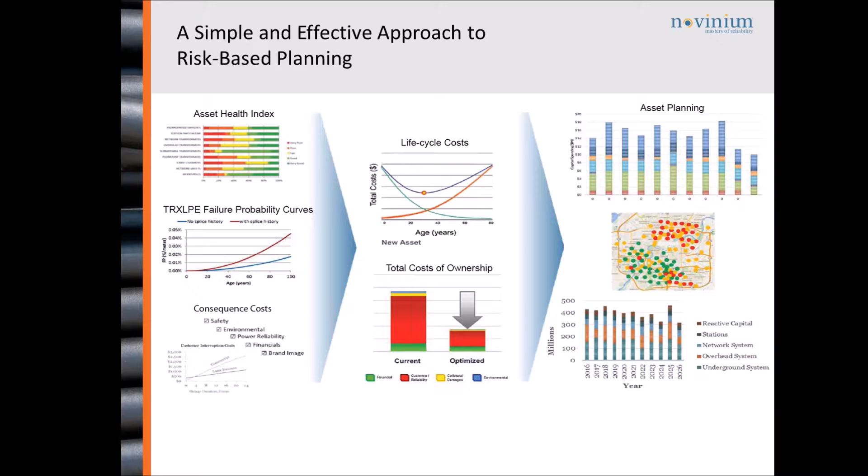In terms of the cable planning approach, this really begins by looking at the utility's data relating to cables. That includes condition assessment information that can be used to determine the failure probability of the cable, and it also involves the quantification of the cable's impact if it fails. These two components can be used to measure the risk of cable failure, which can ultimately be used as part of a life cycle costing and total cost of ownership analysis.

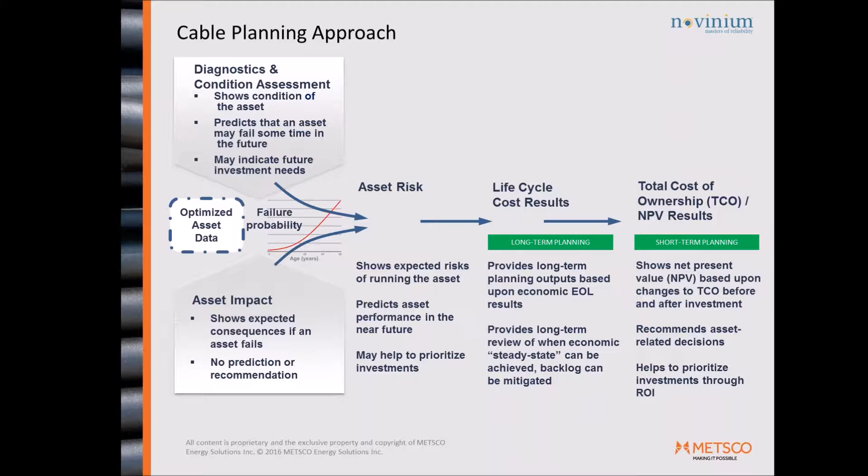I want to talk about the individual building blocks we're using as part of this risk-based assessment, beginning with the cable's condition assessment or health index. How do we develop a health index for cables? We start by building an architecture with the help of subject matter experts at a utility who have knowledge of the specific types of cables or subtypes of cables that are introducing problems within a given distribution or transmission system.

And then we'll also look at all of the different types of data that would be available on underground cables. We'll look at the testing information, maintenance and inspection information, and from all of this we're able to develop an architecture that can be used to quantify individual health index results for each cable segment. That will be done using the cable's asset age, inspection data, loading data, as well as degradation factors which are individually weighted as they relate to the overall probability of failure of the cable asset.

Some of the issues we've seen with polymeric cables, especially those installed between the 1970s and 80s, include water tree phenomena, imperfections with respect to the jacket and semicon, and this can lead to issues such as overheating, partial discharge, and leakage around the splice, joint, and terminations, tracking and erosion. With oil-filled cables, we also see dryness phenomena.

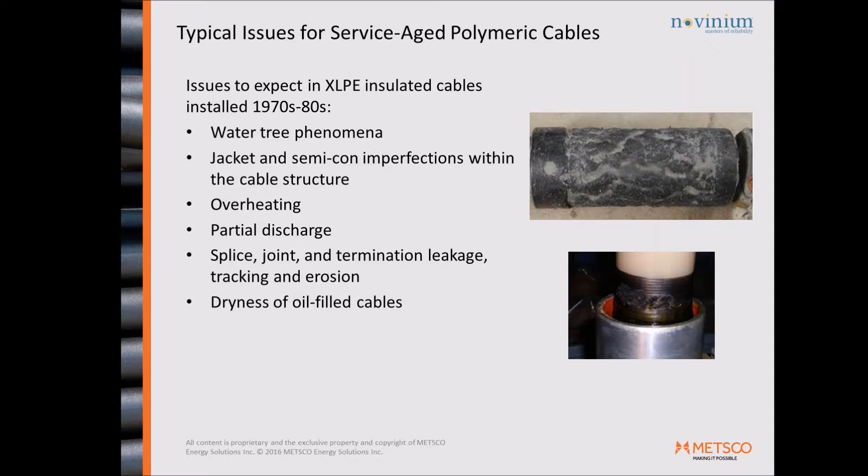So how do we combat all of this? We can develop a health index for cables, and this shows an example of how a health index can be implemented for polymeric XLPE cables.

Now, the health index is going to contain individual degradation factors. Degradation factors result in irreversible damage to the cables, resulting in the overall probability of failure of the cable asset. In this example, we have three degradation factors, including the service age, historical failures or cable failure analysis, and the cable's historical utilization or loading history. Each degradation factor is individually weighted as it relates to the probability of failure of the cable.

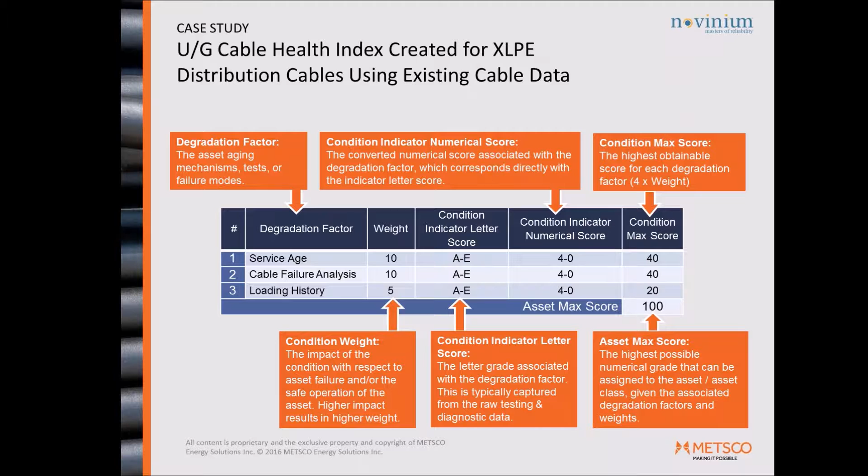Depending on the utility's processes, either a letter grade or a numerical score will be assigned to each degradation factor, and each degradation factor will carry a maximum score it can achieve. In this example, the highest score that could be assigned to this asset would be 100, meaning it would be in very good condition. The lowest score, which would be a 0, would mean that the asset is in very poor condition.

Now, each of these degradation factors will have individual grade levels, with definitions for each grade level. So in this example, based on the service age degradation factor, if we have a grade of A assigned to a given cable, it carries the youngest age — younger than 15 years. If we have a grade of E, it's going to be older than 45 years of age.

And we can translate those letter scores into numerical scores. So the grade of A, the highest, translates into a score of 4. The lowest, E, translates into a score of 0. And we see similar grades and definitions for the other remaining degradation factors for cable failure analysis and for loading history.

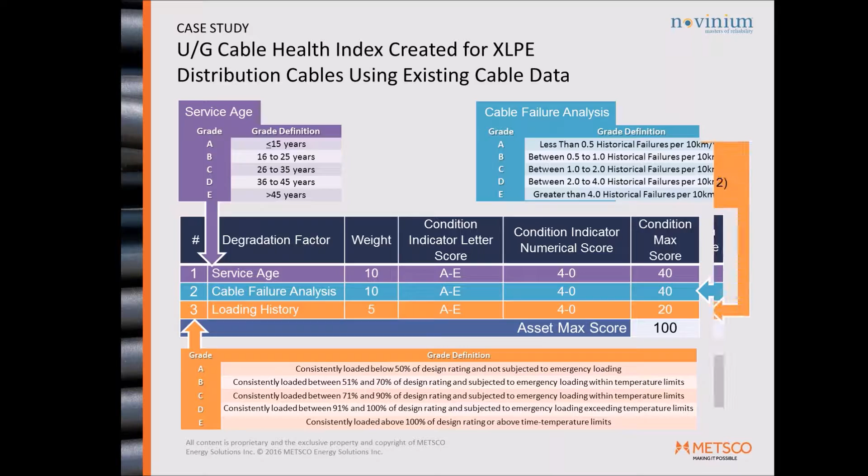So if I take you through an example: we could have a cable that has a score of 3 and a weight of 10 for service age, which would translate into a service age score of 30. In terms of failure analysis, maybe it has experienced a lot of failures, so it ends up with a score of E or 0, and failure analysis is given a weight of 10, so it would be assigned an overall score of 0.

And then the loading history — perhaps it's been assigned, based on its utilization, a score of C or 2, and loading history carries a weight of 10, so it gets an overall score of 20. Based on these individual scores — 0, 30, and 20 — we divide this by the maximum score that could be achieved for that cable segment and translate that into a percentage. In this example, we end up with an overall health index of 50%, or fair.

As I mentioned before, the health index numerically can vary from the best score of 100, which is very good, to fair, to poor, all the way down to very poor, and very poor would be anything between 0 to 30%.

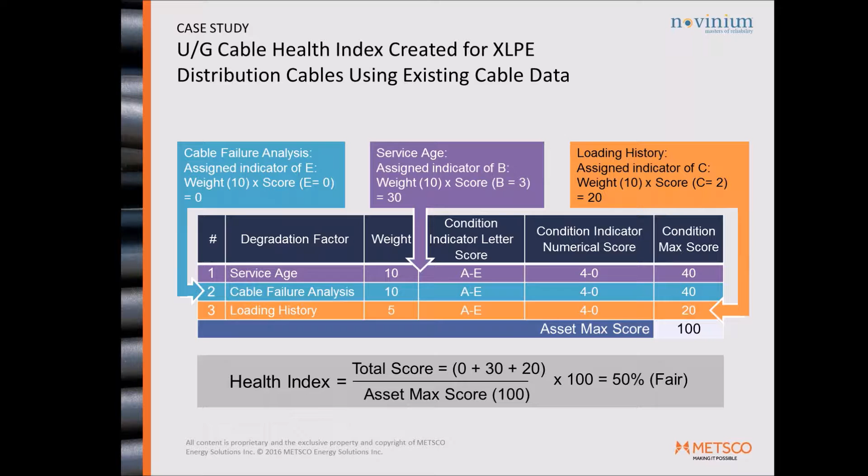Now, based upon these results, this can provide an immediate view to utilities on what assets they should replace and what backlogs they would face depending on the different health grades. So how many assets do utilities have that are, for instance, in very poor and poor condition, which would need to be managed in the near future?

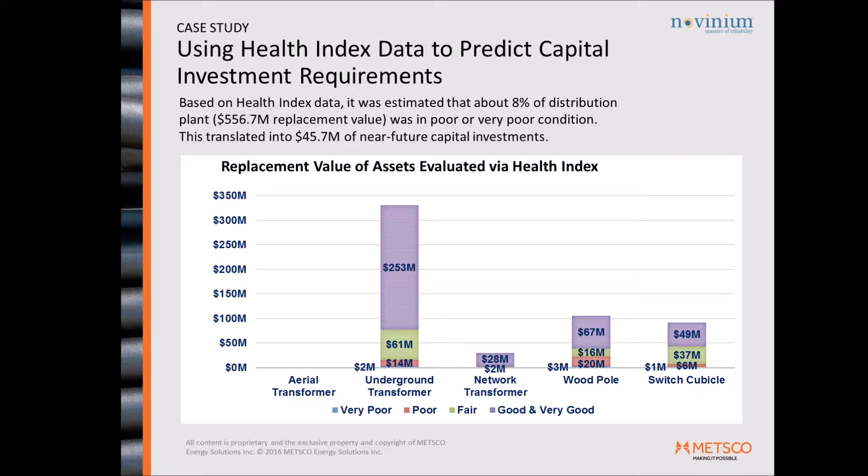In this example, we're looking at the replacement value of the assets as they're categorized by asset class and by the different health grade definitions. This gives an indication that 8% of their distribution plant or replacement value is in poor and very poor condition, which translates into about $45.7 million of near-term investments they're going to have to make. The replacement value is based on the total cost of replacing or rehabilitating that equipment based on material and labor cost.

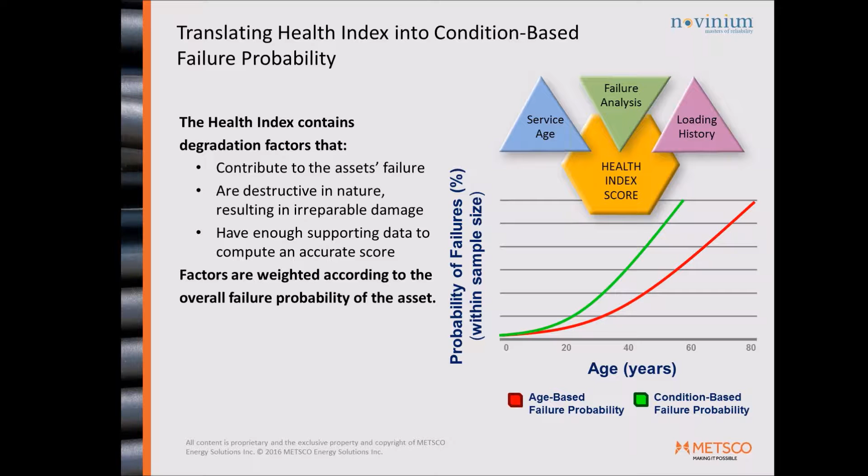So I want to talk a bit more about the failure curve calculation, how that allows us to predict the failure of the asset based upon either the age or the condition. How are these failure curves developed? It really starts by looking at the asset life data for each of the asset classes, including underground cables.

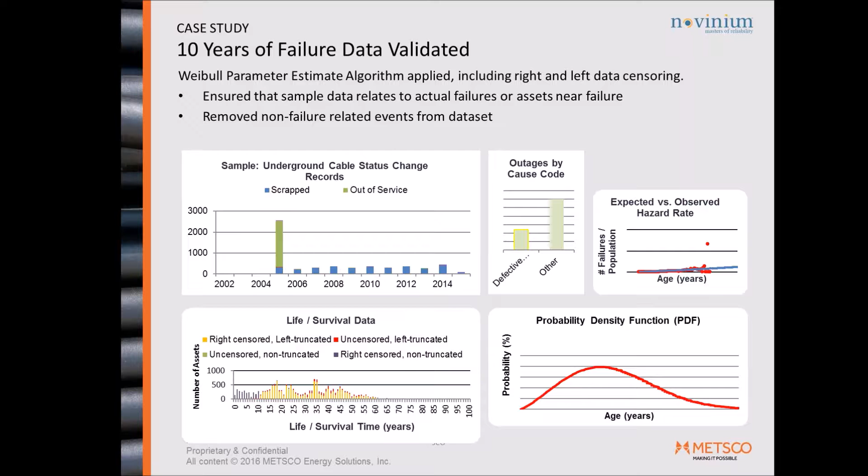We look at when the cables were first installed and when they were ultimately removed from service. We make sure that the data has been properly filtered so that we're only including those cables that actually failed or had been proactively replaced due to imminent failure. If that information is acceptable, we include all of that as part of what we call a probability density function, or PDF, which eventually gets translated into a hazard rate function, or HRF.

Here's an example of what that hazard rate function looks like. The hazard rate function is really the final failure probability curve that relates the asset's age to the failure probability. This is an example for cables. And in the case of cables, not only are we looking at the age, but we also look at the length, because the failure probability calculation is computed on a per meter basis.

In this particular example, we see that for XLPE cables, when the cables had historical events or splices, so splice history, we found that the cables were three times more likely to fail as opposed to cables that had no splices at all.

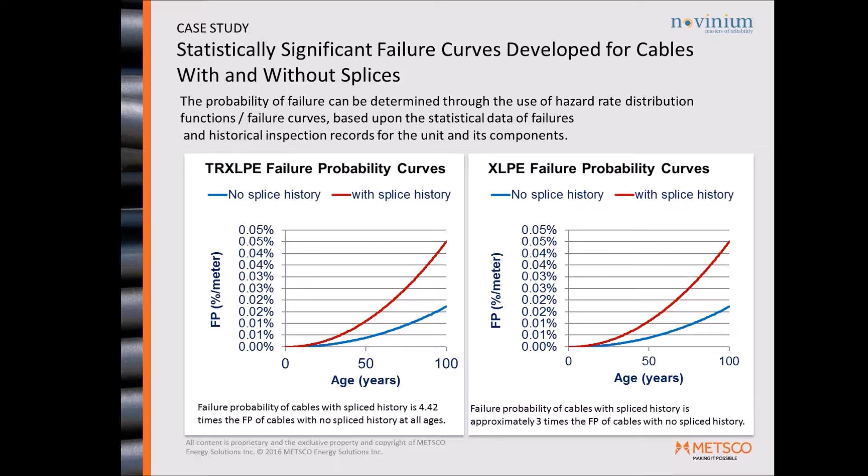So once we've determined the probability of failure, the next step is to figure out what happens when the failure occurs. What are the consequences or the impacts of failure?

As an example, if I look at this chart at the top here, I see a given asset. It has a failure probability of 5%. We can subdivide that 5% into different failure modes.

Here we see a specific failure mode table for cables. These are cables in cable chambers. We have XLPE and PILC cables in cable chambers, and each one has a specific failure mode assigned to it. We have relative probabilities for each one.

So we're saying that a cable, 95% out of that 5%, it could be just a normal failure, or 4.5% out of that 5%, it could be an instance where the duct has collapsed or there's no spare ducts available, or maybe 0.5% out of that 5%, it could go completely catastrophic.

For each one, we want to try to figure out what are the root causes that could result in those failure modes. We also want to figure out what were the outage durations, what was the impact to customers, and were there other impacts in terms of collateral damage. Were there environmental impacts? What is the overall scope of that outage? We want to consider all of those things when we are measuring the impact of failure.

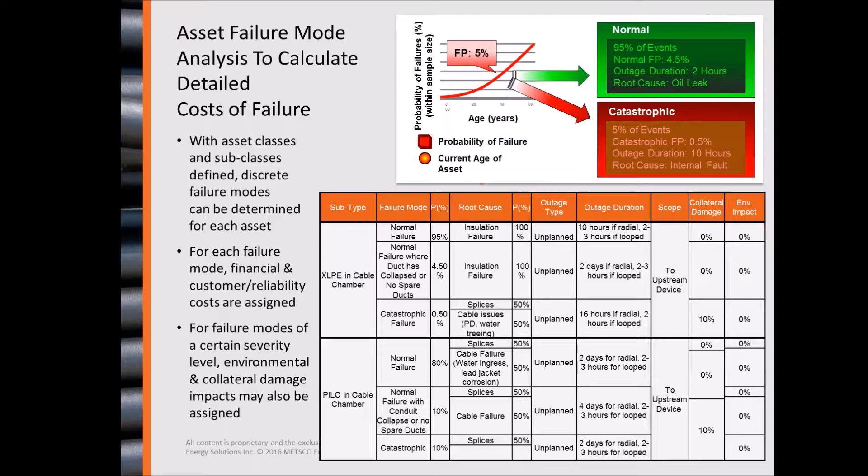In terms of some of the data we would use when trying to monetize the impact of failure, we want to take a look at outage information, historical injuries that have taken place, root cause analyses of damaged equipment, property damage, data on oil spills and leakage, cases of death, revenue loss, and claims that may have been filed against the utility. All of these can be used to establish different categories of consequence for a utility.

The most frequent categories we've seen used include financial, which are the direct costs of intervening on the asset, so either replacing or rejuvenating a cable, for instance. There's the customer impact, which is the reliability impact the customer sees when the outage occurs. There's environmental impacts, which could relate to oil leaks or PCB leaks, and collateral damage impacts, which relate to anything related to safety, injury, or damages to adjacent property when a catastrophic failure takes place.

Now, the customer impact is obviously one of the most critical elements. How do we come up with that customer impact? Well, we use customer interruption costs, and those are derived by really understanding what's happening when an outage takes place.

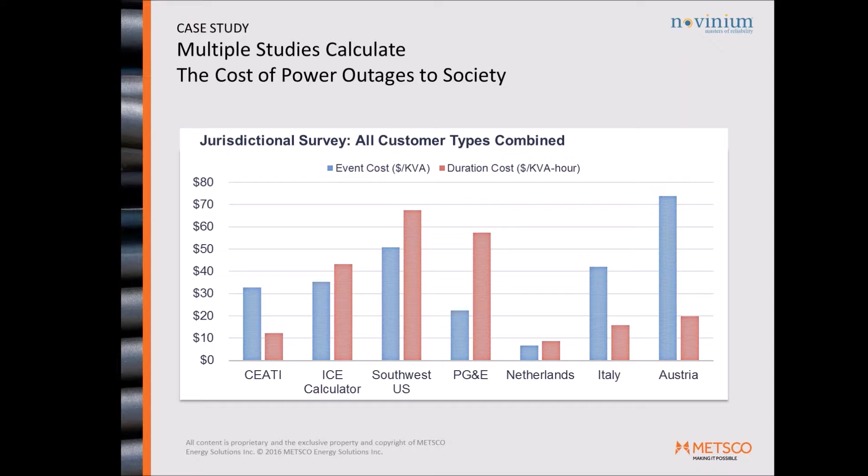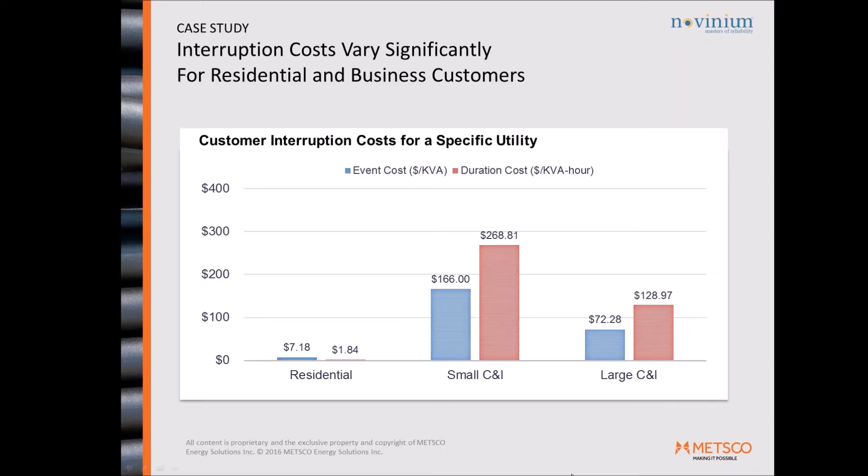Now, these numbers are typically generated by performing a series of surveys and advanced studies with customers in different regions across the world. We see some studies that have been done in North America and some studies performed internationally to arrive at different event and duration costs. And we also see that these costs can vary substantially depending on the class of customer, from residential to small commercial and industrial to large commercial and industrial. We can see some substantive differences in these event and duration cost parameters.

Now, it's important to note that residential customers, typically how their value of reliability is monetized is using a willingness to pay model, really asking customers how much would they be willing to pay to avoid an outage, compared to the data from small and large C&I customers, in which there will typically be direct revenue impacts and data available from those customer types, and that's really the direct tangible losses that those customers are experiencing.

I should say that for residential customers, we are seeing more of that data, direct tangible losses, coming into perspective for that customer class as well, as more customers begin to do more operating businesses from home or working from home. So there are more revenue impacts that are becoming more relevant.

But for now, if you just look at willingness to pay, what we see is that while we look at number of customers, yes, the willingness to pay compared to small and large C&I, it clearly dominates. But then in terms of how we convert all of that into a cost, recall that in our formulas we're using the consumption. And we see here that the consumption of residential customers typically has to be weighted against the consumption of large and small C&I.

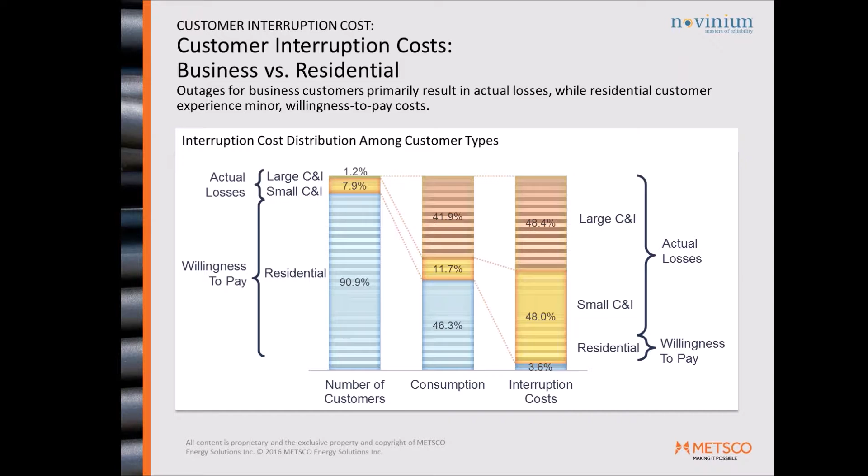And when we actually convert all of this into dollars, we see that the final willingness to pay value is actually a very small amount when measured across an entire utility system, when compared to the total net dollar amounts for small and large C&I, which represents, again, the actual losses that are being experienced. And so what this shows is that really when you're looking at customer interruption costs across an entire system, it's really the actual loss data that's dominating the equation compared to the minor willingness to pay costs.

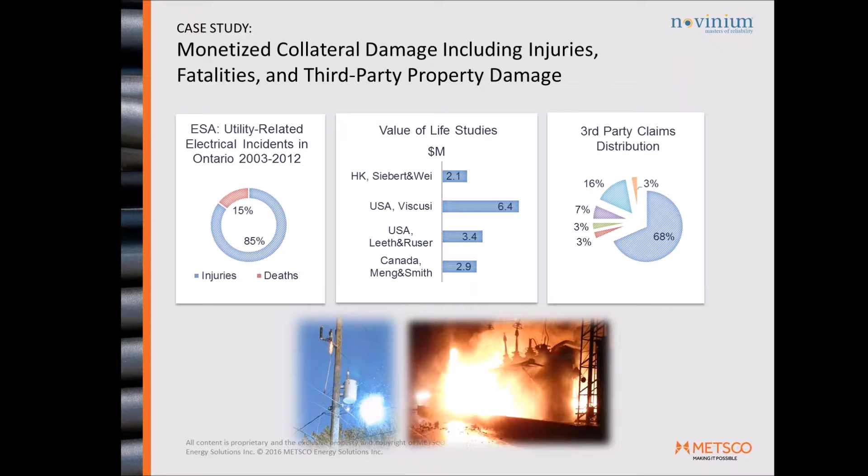Of course, we have to look at other impact categories, including collateral damages, which would be a combination of things like safety-related incidents, the value of a life, claims filed against the utility. These are just some examples that have been performed for utilities in Canada.

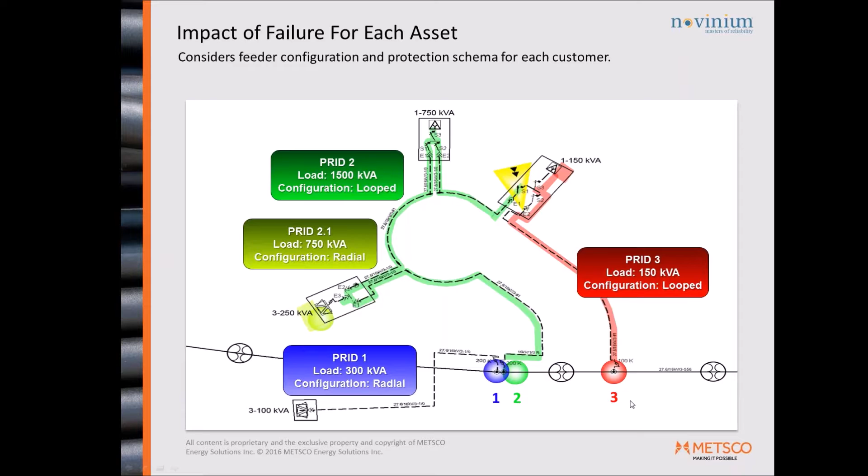Now, once we've established the probability and the impact of failure, now we can establish the risk, and then more critically, we can figure out, well, when do we want to intervene on the asset, and most importantly, what type of intervention do we need to apply?

Utilities are always facing essentially more and more challenges at a regulatory level. Regulators want to ensure that utilities have considered every possible intervention option. And for cables, most importantly, it's critical that both replacement and rejuvenation are considered as part of an analysis.

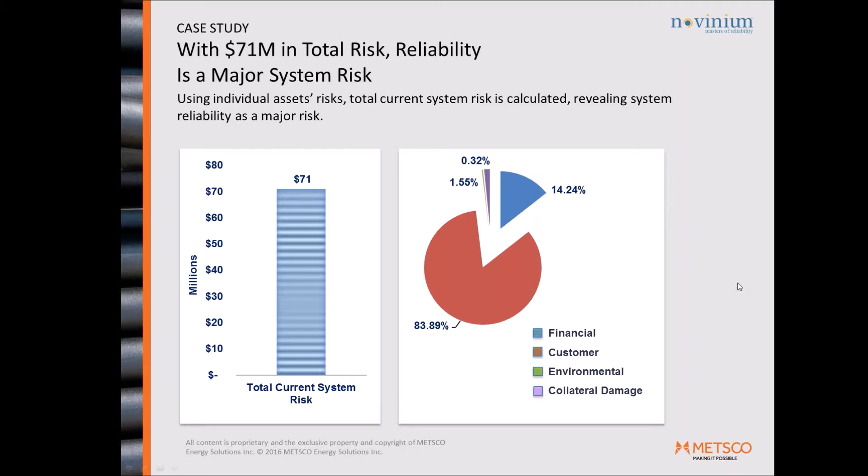So when looking at, for instance, the total risk that can be measured within the system, once we've figured out the probability and the impact, we can measure what's the total system risk. And in this example, we see just over 70 million in risk across an entire system, and we see that the customer portion of that risk is clearly dominating that value, which is to be expected, as reliability remains a critical element within any electrical system.

Optimally, we want to replace that asset, to intervene on it at its minimum operating cost. But we have to consider that the existing asset to be intervened upon, and the new asset to be installed, will have different risks. For instance, you could have a direct buried cable as your existing asset, which may be replaced by a new asset in concrete encased conduit.

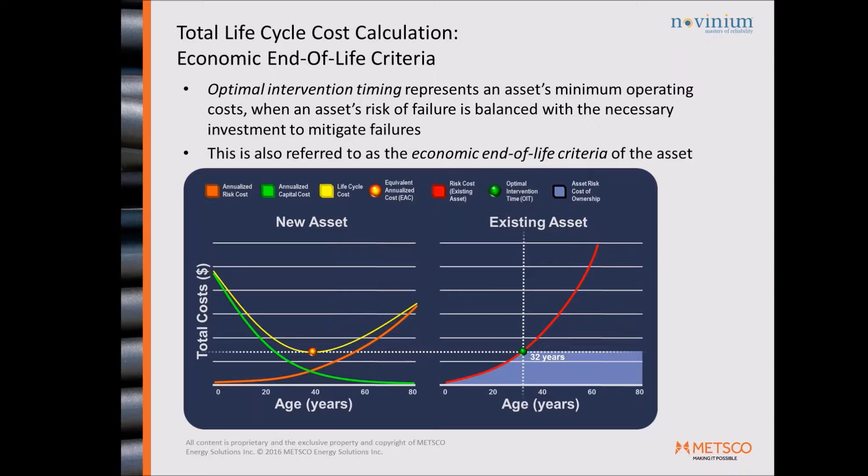Now again, when considering underground cables, we have to consider the different intervention options that can be considered. Cable replacement can be very expensive, especially when replacing direct buried cable with new standardized cable and conduit, or cable in concrete encased conduit. That's where cable rejuvenation can be considered as an alternative intervention, which allows for the extension of cables using a low-cost cable injection procedure.

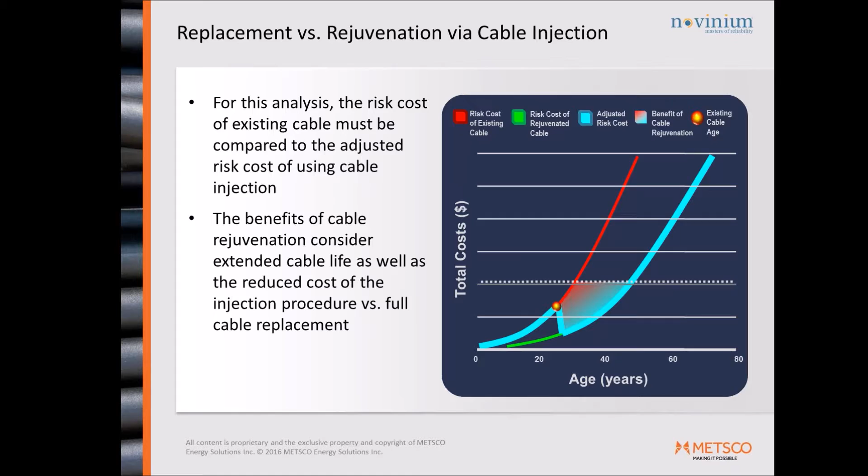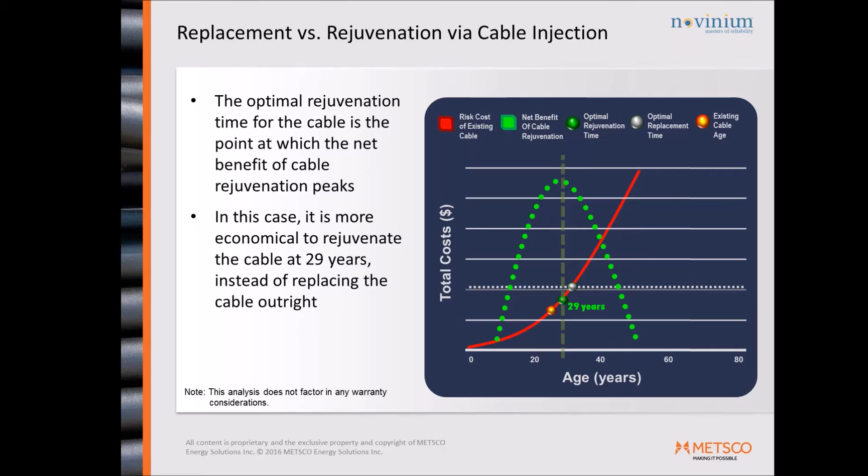Of course, we want the cable's current age to be within the parabola, and we want to make sure that the cable's optimal rejuvenation year comes before the replacement time. In this example, it's telling us that it is more economical for us to rejuvenate the cable at 29 years, as opposed to replacing the cable outright.

Now, when utilities follow this framework and intervene on their infrastructure at their economic end of life, in essence they are reducing the total cost of ownership. And it's this reduction in total cost of ownership that we want to take a look at when trying to capture the benefits of doing the work.

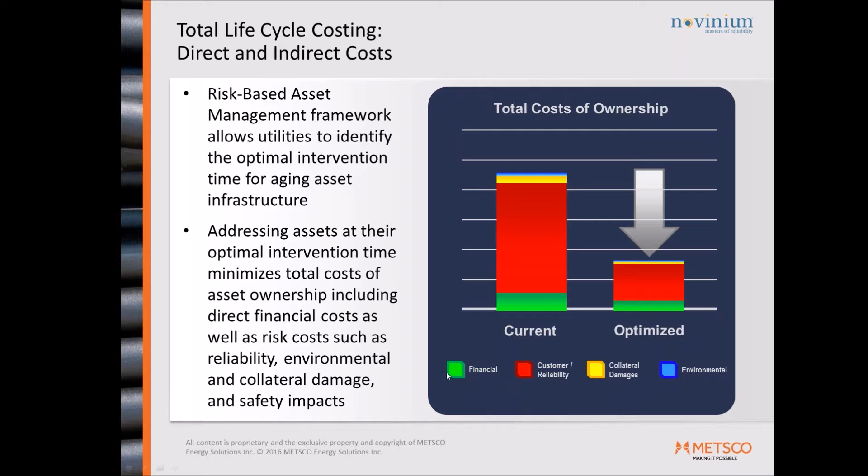In essence, the difference in total cost of ownership, that net difference, becomes the net present value or the benefit of doing the work. Again, we're taking into consideration all of the different concepts we talked about before: the financial, the customer reliability, collateral damage, and environmental categories.

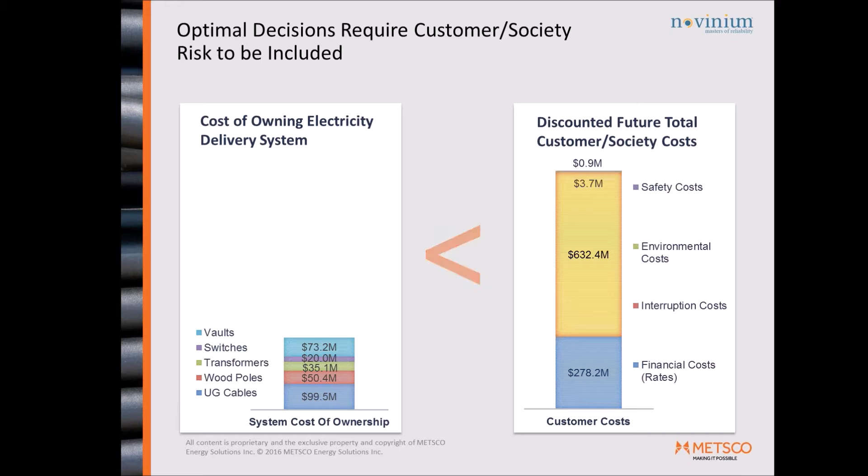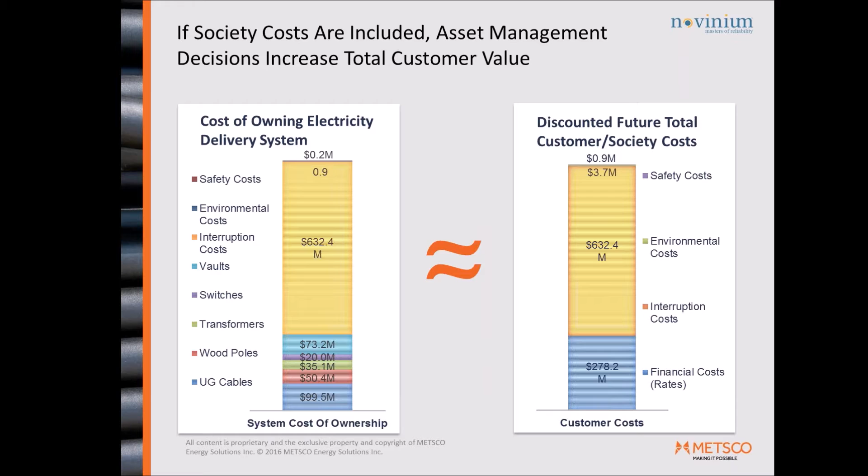We have financial costs as they relate to the rate base, but then there's costs as they relate to interruptions in the system, environmental impacts, and safety costs. All of those things have to be considered within this calculation, and that's the only way we can come up with asset management decisions that truly take into account the total customer value.

Once we have been able to apply this approach to an entire population of underground cables, determining their economic end-of-life criteria, we can come up with a long-term investment profile like this, which tells us which cables we're going to replace, which we're going to rejuvenate, and when to perform those interventions. At year 0, we have a backlog of assets that must be intervened. Once the utility has intervened on all of those assets and mitigated that backlog in the first year, we say the utility has achieved an economic steady state by minimizing total cost of ownership across the entire system or for a given asset class.

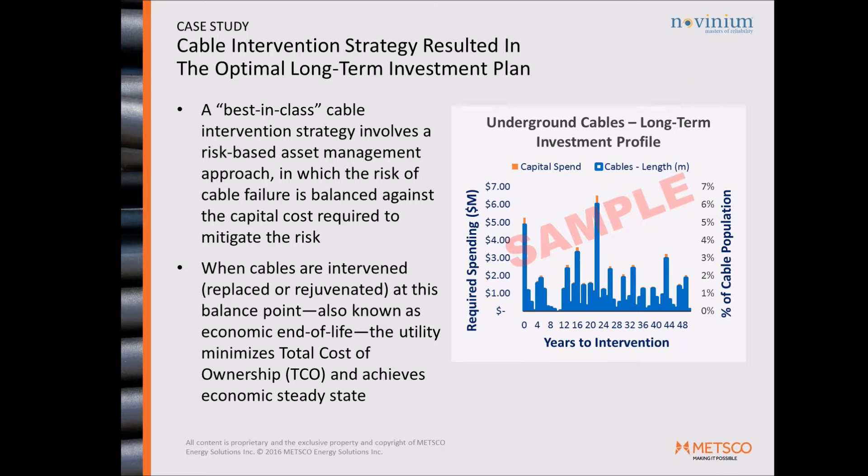As I mentioned before, this cost of ownership analysis can extend into other ways. We can take a look at different investment alternatives for a population of underground cable infrastructure. For instance, we can choose to continue to run cables to failure, or defer investments and just install a series of fuses and switches, improving operating flexibility and reducing further impacts of failure. Or we can choose to perform full cable intervention at once, rejuvenating and replacing a series of cables all at once.

Each of these strategies can be compared against each other by looking at what that net reduction in total cost of ownership will be.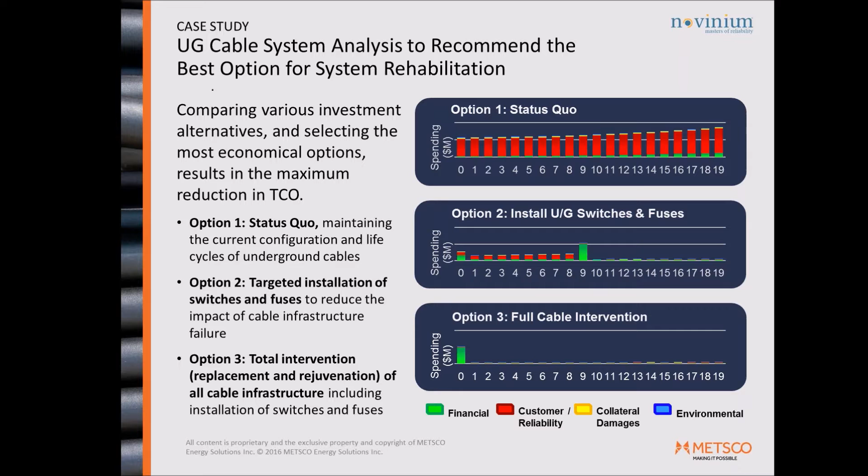Here's an example where we're considering three options. In the status quo option, run to failure, there's really no change in the total cost of ownership, so your net present value is going to be essentially zero. If we choose to replace or rehabilitate the assets at their optimal intervention time, we see some benefit. But it's only in options 2 and 3 that we start seeing a substantial increase in benefits.

Option 2 means we're going to defer investments and install switches and fuses right away, and we see a substantial increase in net present value, meaning we've reduced the total costs of ownership quite substantially.

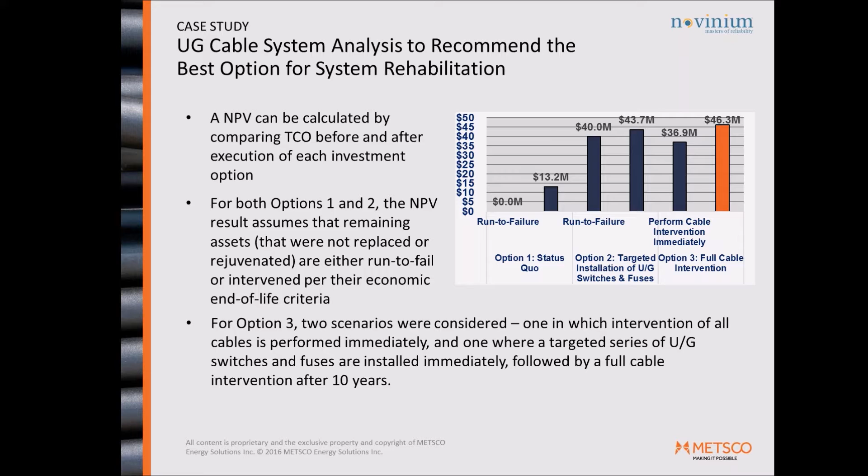In the third case, we're doing a full cable intervention. In option 3, we consider two scenarios: one where everything is intervened, so the cables are either rejuvenated or replaced all at once, or another where we install the new underground switches and fuses immediately, then perform a full cable intervention 10 years from now. This gets us the highest net present value of $46.3 million.

This is considering the cable's asset age and condition, or probability of failure, along with their individual configuration data for the impact of failure. It's really telling us that it's better to perform targeted reconfiguration of the cable infrastructure immediately through installation of switches and fuses, followed by a deferred replacement and rejuvenation of cables.

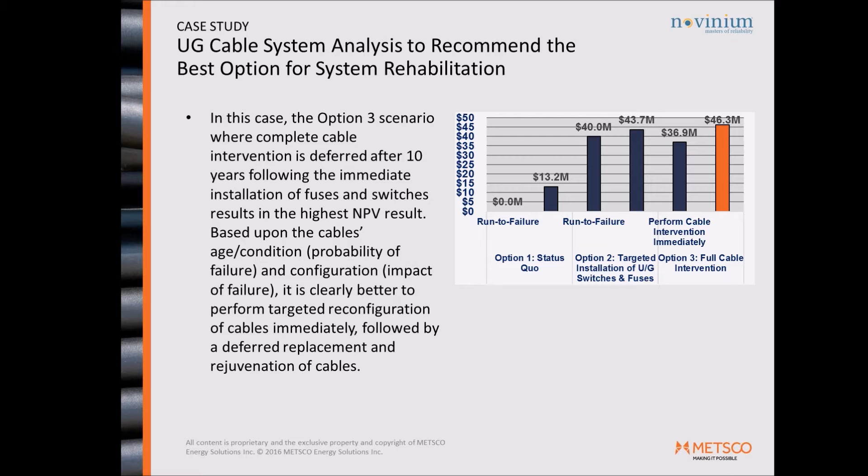So what are our conclusions?

Underground cables represent a critical high-risk asset class due to the many degradation factors that can result in cable failure, coupled with substantial financial and customer impacts of outages. A risk-based asset planning approach is really a best-in-class approach for cable management because it lets utilities predict when failures are going to occur. We can quantify the impacts of failure, considering all the different categories relevant to a utility. We can determine the optimal time to intervene, and this approach allows for different interventions to be considered.

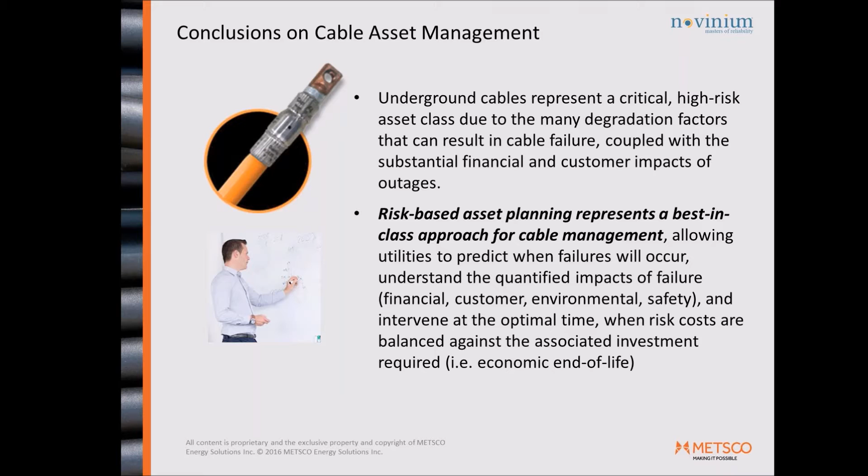In the case of cables, we're really showing regulators that we're considering all of our options. Do we want to replace? Do we want to rejuvenate the cables? We're intervening when the risk costs and capital costs are all properly balanced against each other, using this economic end-of-life criteria. Data optimization and validation, as part of continuous improvement, can help make failure probability and health index calculations more accurate.

Results can be further enhanced over time by introducing additional parameters. This approach should take into consideration the different alternatives and intervention options available to utilities, including replacement and rejuvenation. By replacing or rejuvenating cables at their economic end of life, this is how utilities are able to minimize their total costs of ownership.

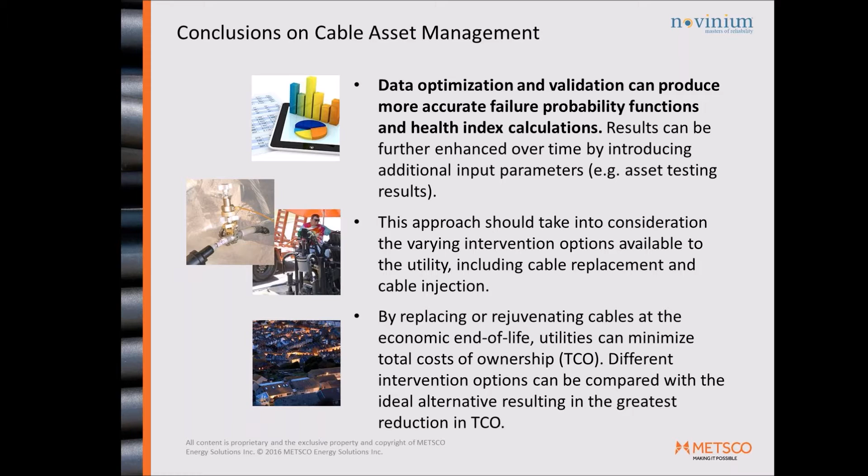All right, thank you, Robert. We have received some questions from our audience. The first one is, what kinds of results do you usually get from this approach?

What we typically see with utilities, and this is because in most cases utilities have just transitioned into a proactive asset management approach after formerly running a lot of their infrastructure to failure over many years, is a backlog of equipment that needs to be intervened on immediately. So what the utility needs to do next is develop a long-term program that aligns with their resource constraints, system constraints, essentially what they're able to execute operationally, and then they can determine when that backlog is going to be mitigated over time, or in essence, when they're going to achieve that economic steady state through the investments they're performing.

All right, thank you. And our next question: your health index includes maintenance and inspection data. What do you collect as inspection data for buried cables?